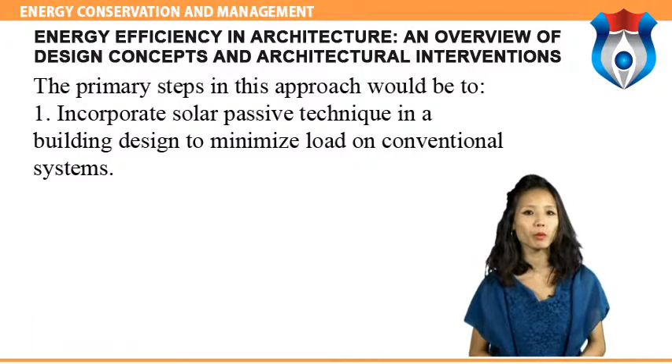However, buildings can be designed to meet occupants' need for thermal and visual comfort at reduced levels of energy and resources consumption. Energy resource efficiency in new construction can be effected by adopting an integrated approach to building design. The primary steps in this approach would be to incorporate solar passive techniques in a building design to minimize load on conventional systems: heating, cooling, ventilation and lighting.

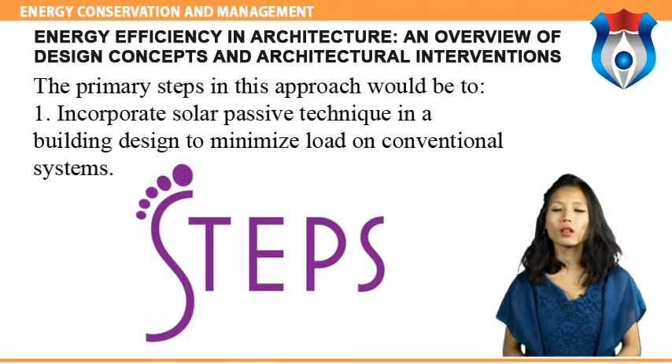Passive systems provide thermal and visual comfort by using natural energy sources and sinks, for example solar radiation, outside air, sky, wet surfaces, vegetation, internal gains, etc. Design energy efficient lighting and HVAC systems: heating, ventilation and air conditioning. Once the passive solar architecture concepts are applied to a design, the load on conventional systems, HVAC and lighting, is reduced. Further, energy conservation is possible by judicious design of the artificial lighting and HVAC system using energy efficient equipment,

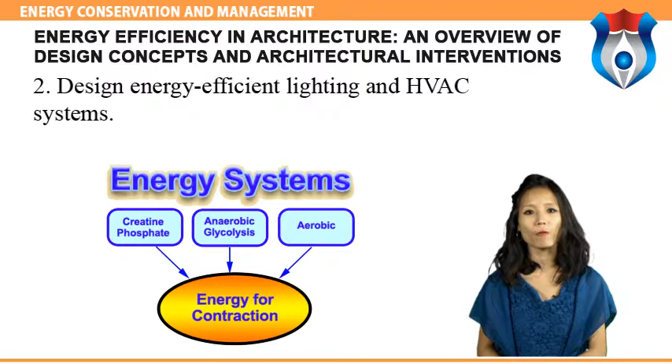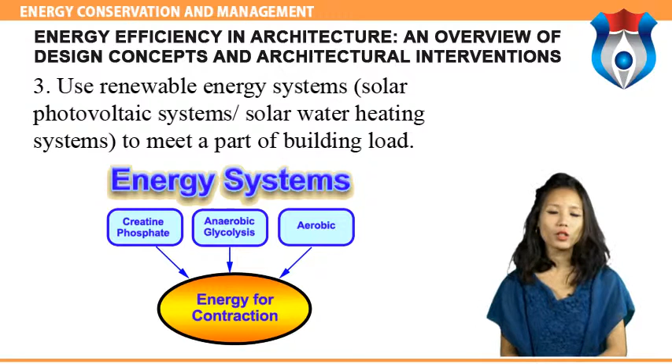controls and operation strategies. Use renewable energy systems, solar photovoltaic systems, solar water heating systems to meet a part of building load. The pressure on the earth's non-renewable resources can be alleviated by judicious use of earth's renewable resources, that is solar energy. Using solar energy for meeting electrical needs of a building can further reduce consumption of conventional forms of energy. Use low energy materials and methods of construction and reduce transportation energy.

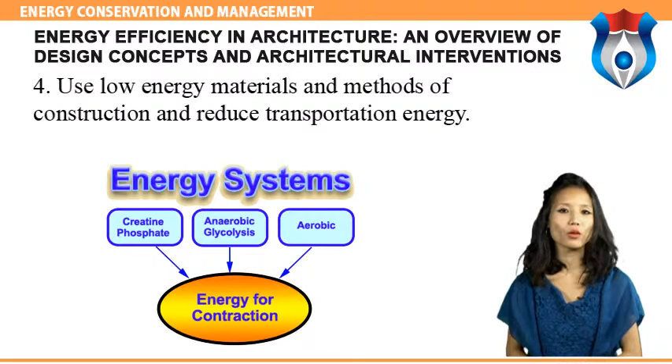An architect also should aim at efficient structural design, reduction of use of high energy building materials, glass, steel, etc. and transportation energy, and use of low energy building materials. Now moving on to the next topic, we will study the importance of energy efficiency in buildings.

Rapidly increasing energy prices, concerns about resource depletion and climate change and calls for national energy self-sufficiency have concentrated people's minds on the role energy plays in our lives. Much of the effort is focused on securing sufficient supplies of oil, gas, etc. at affordable prices, but reducing energy demand at source can be a better alternative. Rural India is more dependent on traditional biofuels. On average, 55% of households in India have access to electricity, this figure falling to 43.5% for rural areas.

The construction industry is booming and is one of the largest energy-consuming sectors in India. Even a 10% reduction in energy use in buildings would have a significant impact on national energy requirements, and this could be achieved with little or no investment, simply by being more diligent in our use of energy in homes and offices.

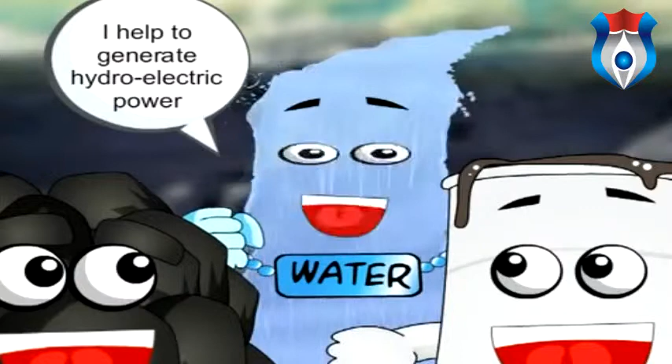Energy use in existing buildings. Since we replace old buildings with new ones only at a very slow rate, it is important to consider how we use energy in the buildings already there. The first step in an energy efficiency approach is to find out where in the building the most energy is used. An energy audit will pinpoint those areas and enables the most effective measures for cutting the energy cost to be

identified. It is estimated that buildings could save 10 to 15% on their energy bills by implementing energy efficiency improvements, which not only make the environment more comfortable, but can also yield long-term financial rewards. The thermostat should not be set at a colder setting than normal when the air conditioner is switched on. It will not cool the home any faster and could result in excessive cooling and therefore unnecessary expense.

The smaller the difference between the indoor and outdoor temperature, the lower the overall cooling bill. By allowing the temperature to drift upward slightly by a degree or so, a substantial amount of energy can be saved. Also, windows and openings should be closed when using air conditioning, as there is little point in using energy to cool the air while allowing a large amount of warm air into the building. Location of a temperature sensor should be such that it senses the temperature experienced by the occupants and can therefore control the environment to the desired level.

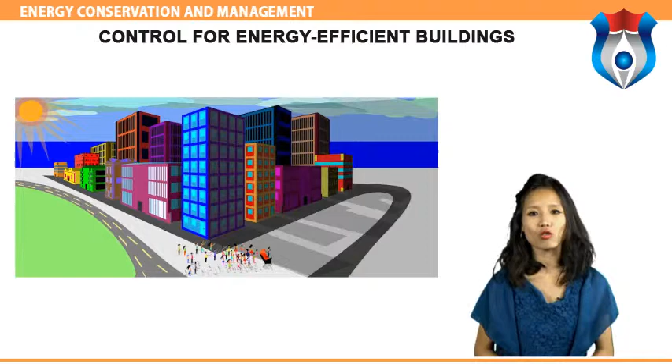Real-time control and optimization can help building owners and tenants minimize energy consumption and cost based on inputs from occupants, local utilities, and weather conditions. Challenges for implementation of advanced control solutions include the heterogeneity and complexity of typical building environments. New developments in building models and in building automation systems are addressing these and other challenges.

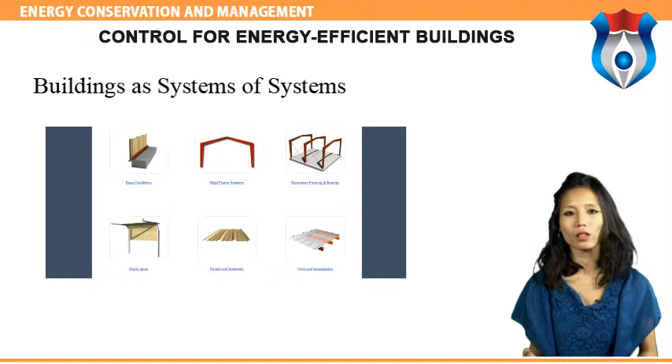Buildings as systems of systems. Buildings are complex systems composed of subsystems that were traditionally deployed independently of each other. This applies not only to building energy systems but also to other systems such as access control, fire protection, and video surveillance.

Heterogeneity. Building components do not necessarily have mathematically similar structures and may involve different scales in time or space. For instance, building control is a complex hybrid problem that includes both continuous and discrete components. Major building systems operate in discrete modes: air handlers cycle on or off, chiller compressors.

Complex relationships. Building components can be connected in a variety of ways, which may cause complicated dependencies between local and system-wide phenomena. The HVAC systems are potentially very large network systems with complex relationships between the comfort in rooms or zones and operation of individual HVAC components.

Challenges and opportunities in energy-efficient buildings. Entropy is the perpetual enemy of building operation. Building systems degrade over time, and today little can be done about it. Historical operational data is difficult to gather from building management systems. Accurate models are generally not available and are hard to develop, and the availability of skilled staff is limited.

Recent developments are helping overcome this difficulty with building information models (BIMs). A standardized way to describe aspects of buildings has become available. Most medium to large buildings now routinely capture large quantities of operational data, and energy efficiency and load management have become high priority imperatives.

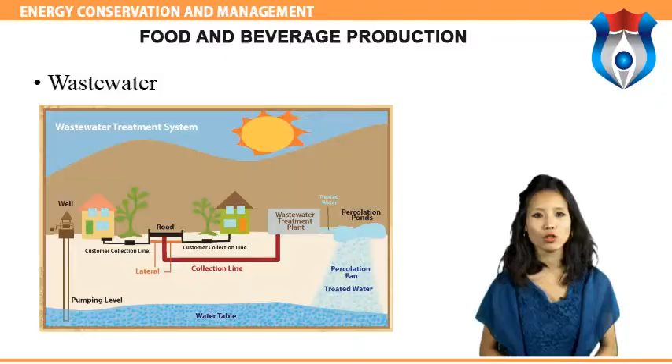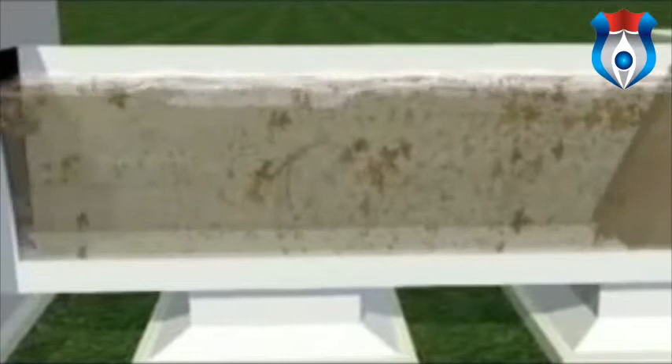This is a very basic overview of the water treatment process. Customers always need water, but rainfall is seasonal and increasingly unpredictable. So we often use storage reservoirs to make sure there's always a supply for treatment. By passing water through mesh screens, we remove sticks, water weeds and other large foreign objects.

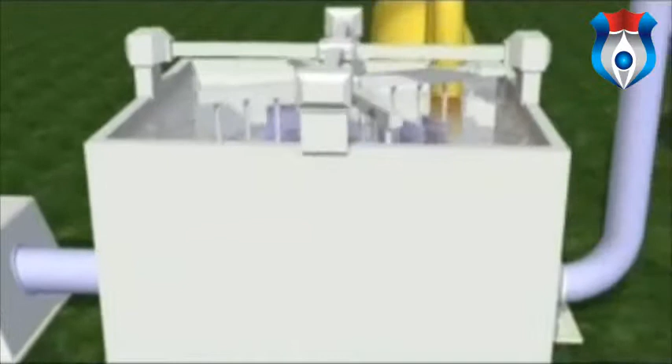The air takes some odours and gas from the water and allows some dissolved metal salts to separate to be filtered out. We add air by cascading the water down a tower, spraying it into the air or bubbling air through it. At this stage, there are still some fine pieces of matter suspended in the water, along with colour and bacteria. We add a precisely controlled amount of a coagulant like ferric or aluminium sulfate.

This reacts with the material in water, making it all stick together to form what's known as floc. To make this flocculation happen, water and the coagulant have to be mixed together very quickly and thoroughly in a special device called a flash mixer.

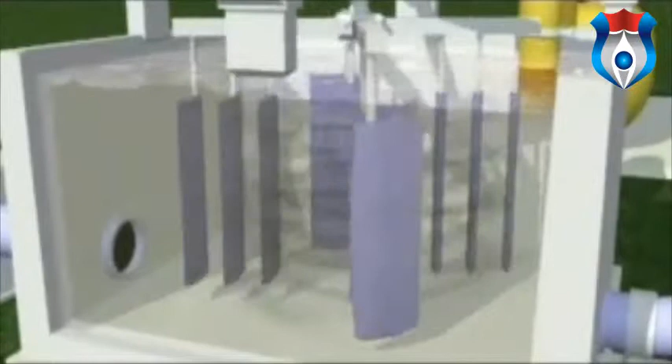Next comes the clarification process. The floc forms itself into sludge and is separated in a specially designed tank called a clarifier. This sludge layer is called the sludge blanket. To control the blanket, sludge is periodically drained off, concentrated and removed for safe disposal. Particles filtered out on the RGF, the rapid gravity filter, are removed by backwashing.

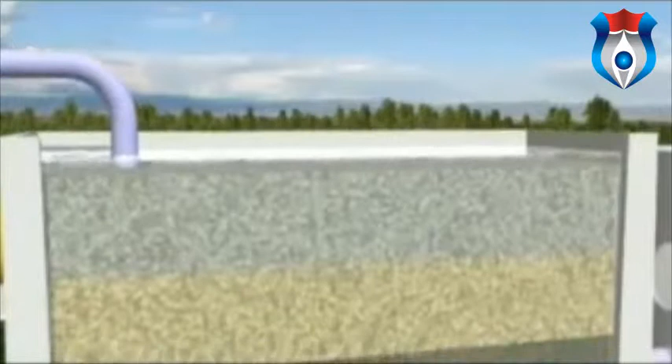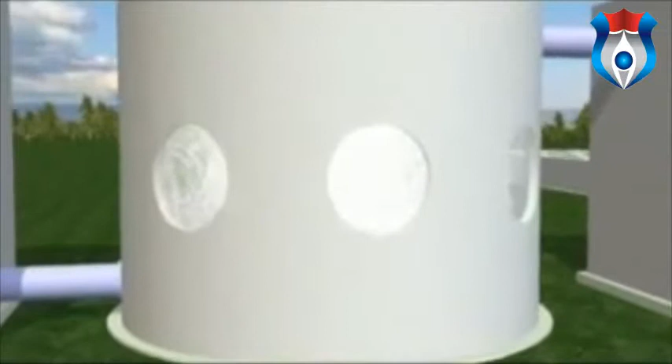The water now needs filtration to get rid of any remaining particles. Water is filtered slowly through very fine sand or sand-like material. For some river waters, we use ozone gas injection as a treatment stage. This can work in conjunction with GAC, or granular activated carbon treatment, where the water is filtered through carbon granules to take out any undesirable traces of largely natural organic materials. The carbon in these filters is removed and regenerated by heat so it can be used again.

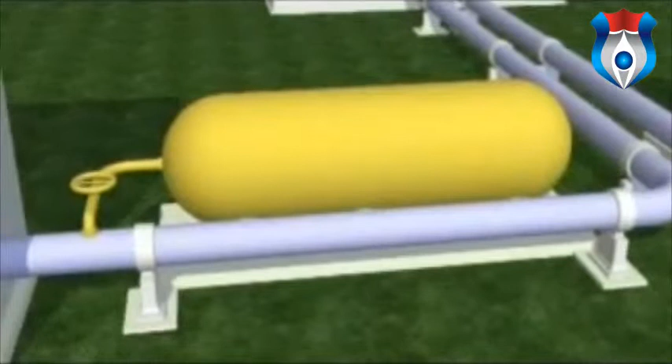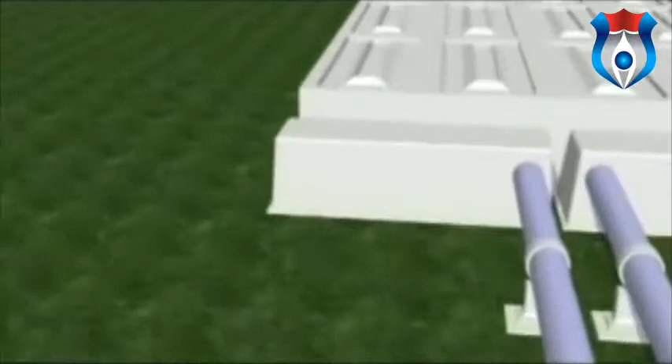Now the water's filtered and thoroughly cleaned, it's disinfected to make sure no harmful bacteria remain. A small, controlled amount of chlorine is the most effective method and provides essential customer protection. This method is used across most of the world. The chlorine has to stay in contact with the water for a period of time for effective disinfection.

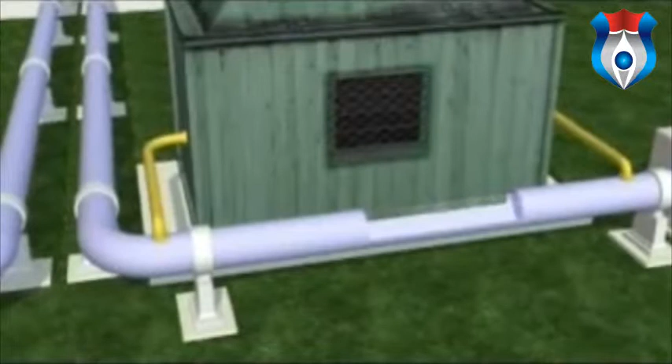Last but not least, adjustments are made to the pH levels of the water during the treatment process so that it's neither too acid nor alkaline. This helps pipework, fittings and the water itself. From the treatment works, water is fed into a huge mains pipe network, nearly 43,000 kilometres long, which forms a grid around the region. This grid is then accessed directly to your home, and when you turn your tap on, it's available to you. Clean, safe drinking water.

The Electric Power Research Institute explains that energy and energy-related costs represent INR 40,000 billion in annual expenditure. Commercial buildings constitute the most electric-intensive sector in the country, with 76% of the energy services provided by electricity. It is estimated there are 4.7 million commercial buildings which consume 35% of the nation's total electricity. Energy costs associated with heating, ventilation and air conditioning (HVAC) add up to one of the largest operating expenses for property owners. In most companies, the cost of energy is the largest unmanaged line item operating expense.

With electricity rates skyrocketing, being able to control a building's energy usage represents a huge savings opportunity. Many utilities have raised their rates more than 70% over the last 2 years and in some cases costs more than doubled. With rising fuel costs, rates are forecast to continue in this direction.

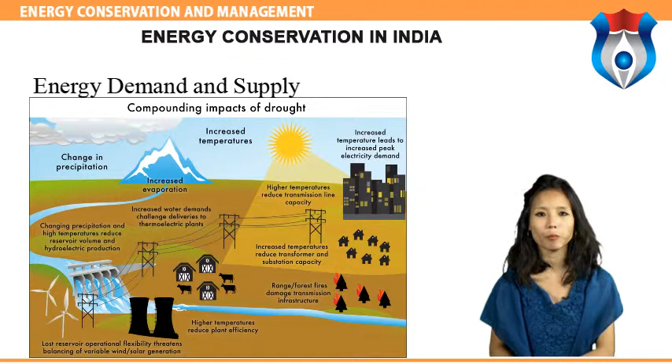The key drivers of energy demand are population growth and economic growth, especially in the coming decade when the emerging economies are in a particularly fast-growing phase and they need additional energy to do that. Now, at the moment we have 6.5 billion people on Earth.

Now all those people, they want prosperity, so they want their economies to grow. So as China and India are in that particular spurt in economic growth, the world can expect accelerated demand growth for all types of energies in the coming decades.

This extraordinary demand growth will probably mean that we also will have to do things differently, so different ways of transport. On the other hand, on the supply side, we have to do things differently as well, because conventional oil and gas resources are not sufficient to keep pace with the demand growth. So we need new sources of supply, be it from renewables or from unconventional resources. However, these things don't always come that easy and normally also at higher costs.

Now, all these things take time. Just to build a new power station can take anything between 5 and more years of planning permission. So very much the decisions you make today really determine the energy system of the future. So a sense of urgency in decision making is important if you want to change the energy system in 10, 20 years' time. Because in the coming 10 years, the energy system is already decided in that sense.